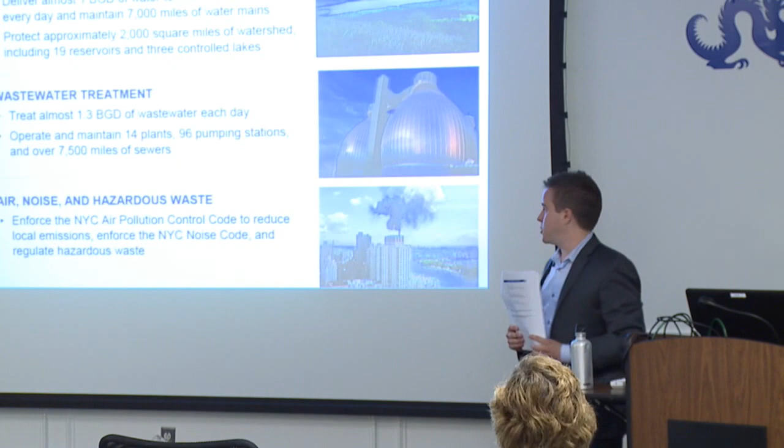But I'm going to focus mostly on water supply, wastewater, and our stormwater management system, which brings runoff from streets to the wastewater treatment system. So I'm going to give a broad overview today of our climate change risks as it pertains to these systems, and really try to focus upon what we're doing now to enhance resiliency.

So based upon what we know, we've already taken numerous measures, some of it regardless of climate change. These are things that water utilities have to think about anyway: drought, heavy rain events, flooding, etc. These are really part of the fabric of water utilities. The question is, how do we operate in the future? How do we adapt infrastructure to changing conditions? How will droughts change? How will floods change?

And so I'll first talk about our water supply system, where really the focus is precipitation, whether it's too much or too little. I'll also talk about our wastewater system, and touch upon extreme heat, which is not something we think about as much when it comes to wastewater. The wastewater system is also affected by coastal flooding, as we saw in Hurricane Sandy.

And stormwater is coming into increased focus. Green infrastructure is in the name of the seminar series. It's a topic that has seen a lot of focus in the past couple years. But increasingly, we're looking at how does green infrastructure function in the face of climate change. And we saw Hurricane Harvey just last week. The questions that we're receiving are, what are the capacities of these types of systems to handle the extremes and not just the everyday rain events.

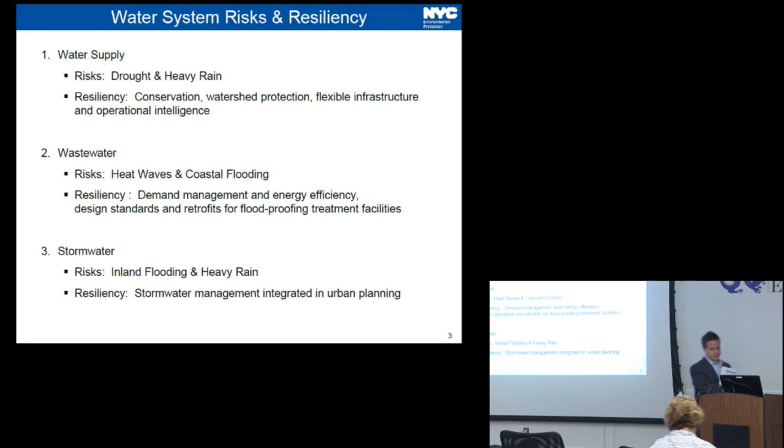So the New York City water supply is a vast system. It's comprised of 3 watersheds. Again, you might hear a little bit more details about this in Carol's presentation. On the left side, you see the 3 watersheds, the Catskill and Delaware system, in the west of Hudson watershed, and the Croton system, which is our oldest system in the east of Hudson watershed. The drinking water travels through an extensive network of aqueducts and tunnels, some dating back more than 150 years, flowing largely by gravity, so it's very low greenhouse gas emissions, and traveling from sources that extend as much as 125 miles from the city.

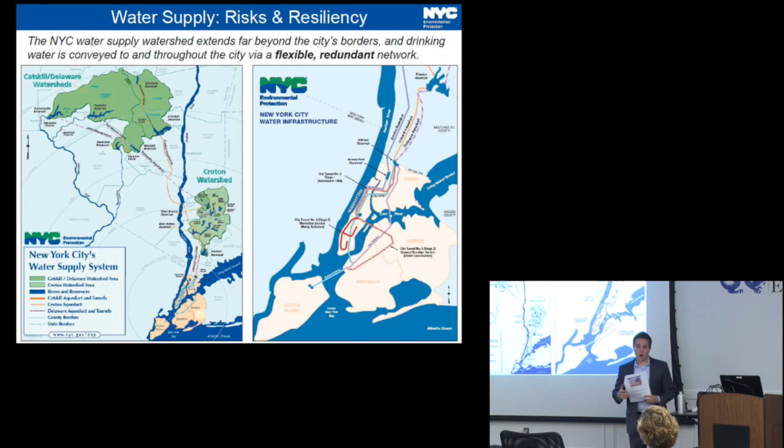On the right, you see our in-city tunnel system. And one of the features that you'll notice is that we have a lot of redundancy. We're in the process of building out the 3rd water tunnel. So this idea that if something goes wrong, you have a backup is really key to how we operate normally, and not just in the face of climate change, but it also becomes a climate resiliency measure. Because it's such a large system, in the wake of storms and droughts that cause disruption to one part of the system, we're often able to draw from other parts of the system, so we can maintain an uninterrupted flow of potable water.

We not only need to meet the city's drinking water needs, but our responsibilities extend beyond the city boundaries. We divert or release water from the system to communities outside the city. We maintain flow in the Delaware River. We support fishery and habitats and recreation. We generate electricity, and increasingly we've been enhancing flood mitigation provided by dams to downstream communities. So there's a lot of factors that we have to consider in the operations of our water supply system.

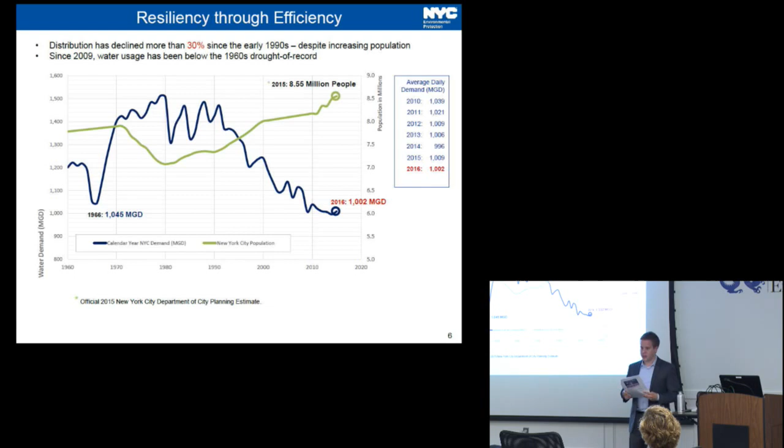We also have robust retrofit programs. A toilet rebate program that ran from 1994 to 1997 led to dramatic savings in water, and we now reinstated that program in 2014. And overall improvements in the efficiency of the new building stock is also important. So we continue to drive down demand through system optimization and fixture replacements at schools and public facilities, as well as residential buildings, and I'll just talk a little bit more about that.

This is just one example of the ways that we're bringing down demand. This is a spray shower at one of our New York City playgrounds. We're working in partnership with the Parks Department, and we implement playground spray showers that conserve water during high demand summer months by ensuring that the showers are only activated while in use.

Without timers and reactivation buttons, playground showers use approximately 5,600 gallons of water per day. Timers can reduce that by 50%, or approximately 2,800 gallons per day. So just last month we announced that 400 spray showers have been upgraded, reducing citywide water consumption by over 1 million gallons per day. This is just, again, one example of the pretty simple things that you can do, especially when you think outside the box of what a water utility typically does.

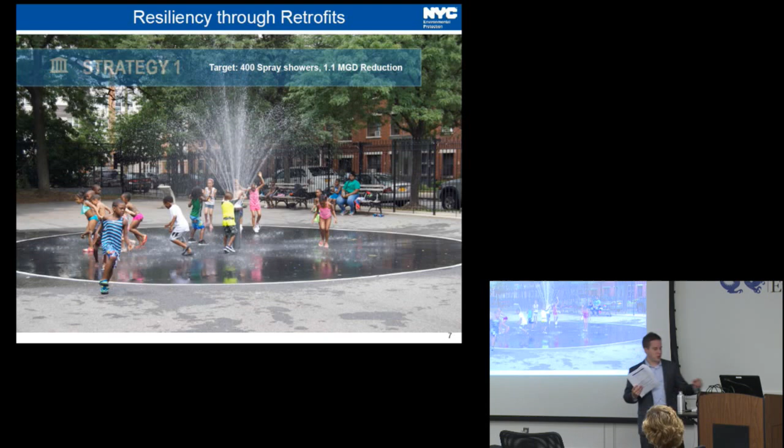You have to consider partnerships with other city agencies and ways that you can not just maintain your infrastructure and fix your infrastructure, but actually bring down your demands and enhance your sustainability. Another example, one way that we're working with the residential sector is through our water reuse grant program.

Other cities are doing this. San Francisco, for one, is doing this in the face of some of the concerns with regards to drought. What we do is offer private property owners capital funding to implement a system that essentially takes used water from flushing, from showers, from cooling, and recycles it into those systems. You don't need to use potable water, drinking water, for flushing a toilet. So why not treat it on site, bring it back into the building, and reduce the amount of potable water you're taking from the city systems.

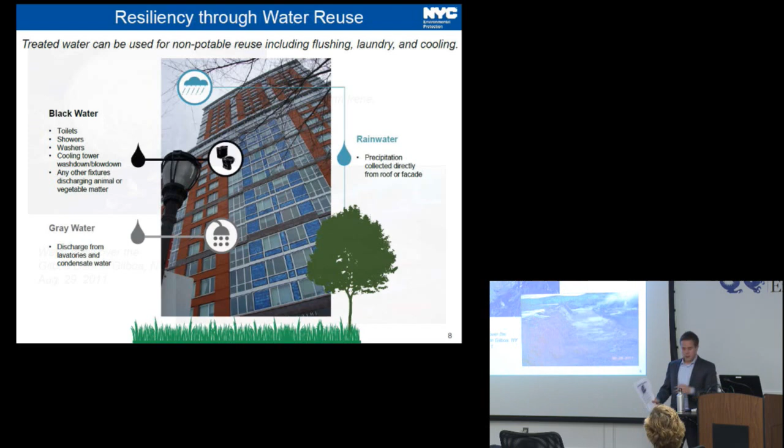So that's just focusing on bringing down our demand in the face of drought and other impairments to our system. But most of the issues that we see with regards to water supply and climate change, or that we anticipate seeing, are a factor of heavy rain events. We anticipate that heavy rain events will increasingly continue to stress our system, like we've seen in the recent past.

Heavy rain events like in 2011 with Hurricane Irene caused high pathogen and contaminant levels in our reservoirs. They increase turbidity, how cloudy the water is from sediment from nearby soils. Again, our water supply has enough flexibility - this isn't necessarily true of every water system, but New York City is very lucky that our water supply system has enough flexibility that we're typically able to withdraw from other parts of the system when this happens.

So this doesn't happen in all three watersheds the same. There's different geology in some of these reservoirs, so some reservoirs are affected more than others. Typically we're able to draw upon other parts of the system when one part is affected. The worst example we have of this - I mentioned on the drought side, our drought of record is the 1960s drought. On the turbidity side, our worst example is from 2011.

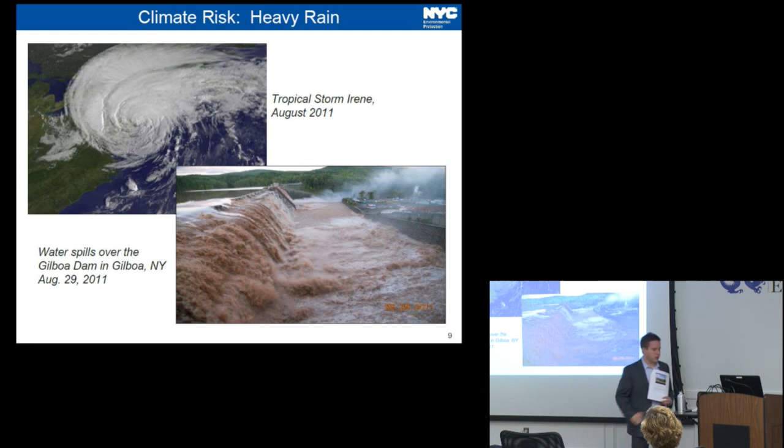So as part of that filtration avoidance, really our first line of defense is our natural systems. Maintaining natural conditions around our reservoirs supports really high quality water. The Catskill and Delaware watersheds are 75% forested. And again, since the early 1990s, we've maintained legal status that we don't have to build a filtration system because of the quality of the water produced by these watersheds.

There are natural solutions. You're always going to have to, especially when thinking about the extremes, seek out the green solutions. But ultimately you're going to need what we call gray solutions, your typical infrastructure fixes.

One example for our water supply is enhancing redundancy and flexibility through interconnections, like the Shaft 4 interconnection. It allows us to reduce flow from the Ashokan Reservoir, which is particularly prone to turbidity. So when turbidity is elevated there, we can reduce flow from that reservoir while still maintaining sufficient flow to meet water system demand.

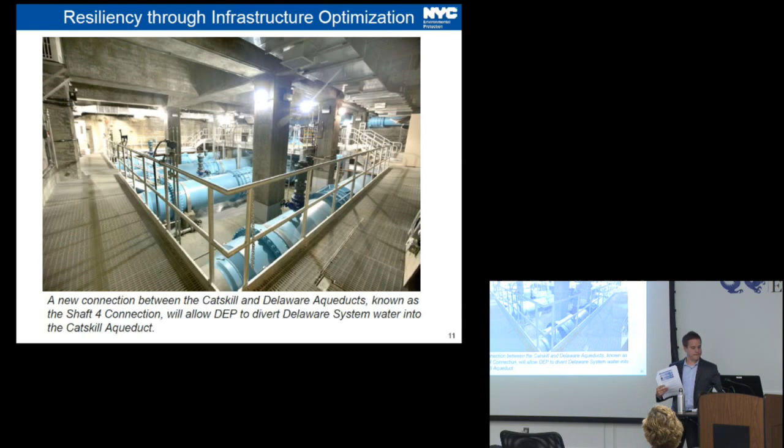Finally, on the water supply side, I want to mention operational intelligence. The more we can understand our system, the more we can make smarter decisions. In the past decade or so, we rolled out a system called the Operations Support Tool. It takes current data about reservoir levels and water quality, and incorporates forecast weather conditions and river and stream flows.

It merges data to check and confirm quality, then simulates water supply operation scenarios, giving us projections to determine how we can operate the system in different scenarios. That's useful both in the near term, managing day-to-day operations during anticipated weather events, and in making longer-term decisions. For instance, we can look at climate change and whether operational decisions tapping into the system's flexibility will allow us to be resilient to the types of changes we anticipate.

So with that, I'm going to shift over to the wastewater system. I've already given a high-level overview of wastewater. This shows our 14 wastewater treatment areas, those polygons represent the drainage areas for the 14 wastewater treatment plants.

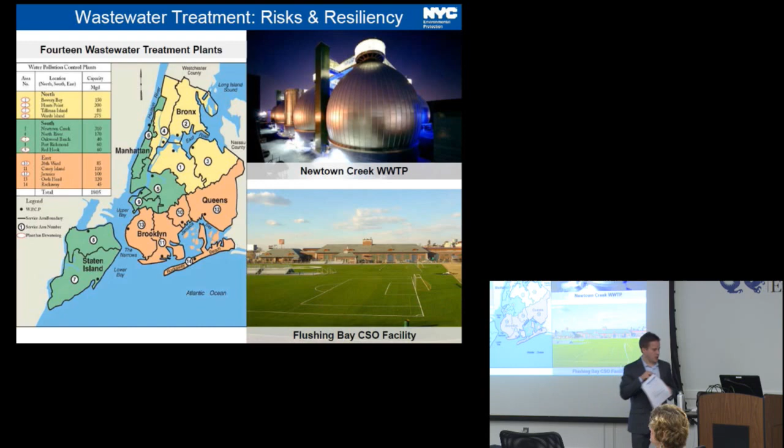I mentioned before that the water supply system is gravity fed and therefore uses very little energy. That's not the case for the wastewater treatment system, this is an extremely energy intensive system. As we continue to build additional facilities like combined sewer overflow facilities, that increases our energy footprint and our greenhouse gas footprint, which in turn can result in strain on the electric grid, particularly in high heat events.

I've talked mostly about flooding, high precipitation, and coastal flooding. But when there's a high heat event, in the past we've seen blackouts and brownouts that have caused wastewater to spill untreated or partially treated sewage into the harbor. We do have generators in place to help avoid that.

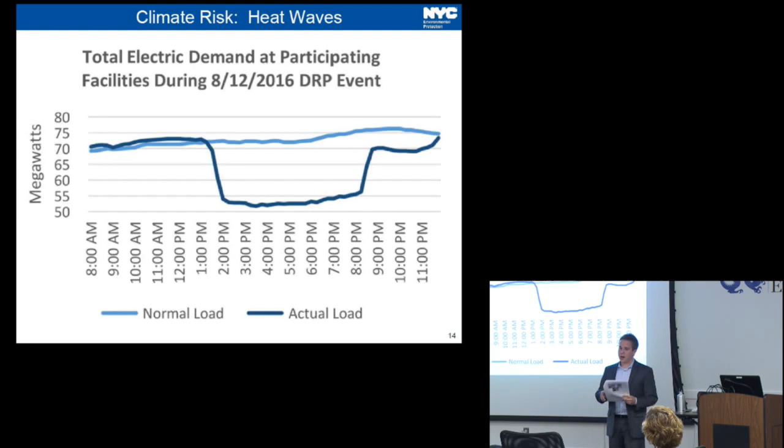But since 2013, DEP has been playing an active role in the demand response program with the state and the city. During a heat wave, we'll be called upon to reduce our demands and thereby mitigate the citywide risk of blackouts and brownouts. That's one way we mitigate risk temporarily, but in the longer term, we're also looking to reduce our energy demand with systems like solar panels.

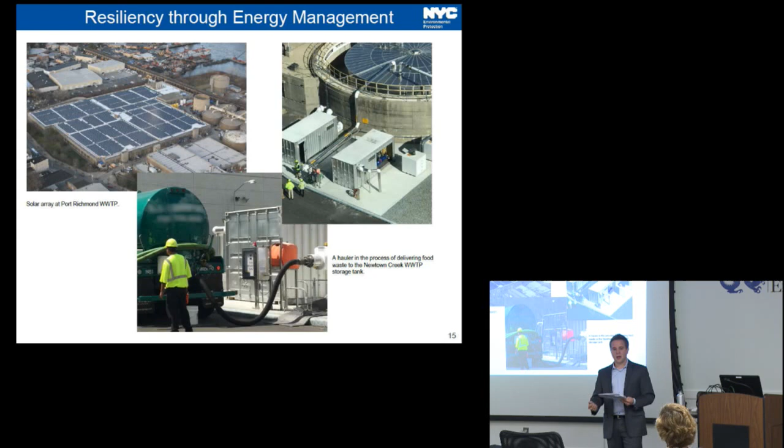Two of our other treatment plants beneficially use some of the gas produced on site for both heating and electricity. At the Newtown Creek wastewater treatment plant, shown in one of my previous slides, we're actually taking food scraps and using them to supplement the amount of gas produced by that facility, then cleaning it up and putting it back into the natural gas grid distributed to the surrounding community. So again, all these things take demand off of the system while also reducing our energy and greenhouse gas footprint.

So the perhaps most stark example of what we might see more of in the future was, not surprisingly, from Hurricane Sandy.

Beyond posing a citywide risk for storm surge and sea level rise, our facilities in particular are at risk. All 14 of them are located directly on the waterfront by design. It's the lowest point, so it can receive the majority of the flow by gravity. It also allows you to bring in ships to ship out the sludge. So that's not something you can necessarily just relocate.

They're there by design. But as a result of that, during Sandy, 10 out of the 14 wastewater treatment plants were damaged or lost power and released untreated or partially treated sewage into local waterways. 3 of the facilities were non-operational for some time, 2 for several hours, and 1 down for 3 days.

Some of the facilities in New Jersey and Long Island fared a lot worse than us and released a lot of untreated sewage into the harbor. We estimate that our contribution to that untreated sewage was approximately 560 million gallons of untreated sewage mixed with rainwater and seawater. So this is something we take very seriously.

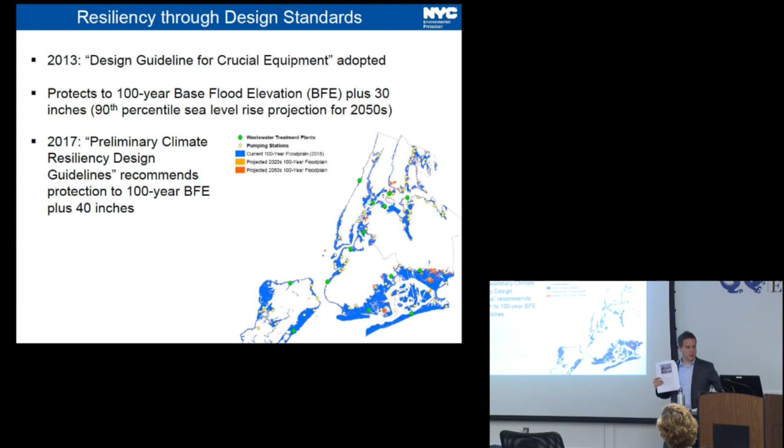So we couldn't just say we'll protect whatever new projects we have, but we also wanted to look at our existing infrastructure and what we would need to do to protect it and retrofit it. So we looked at all of our facilities below a certain threshold, that 100-year flood plus 30 inches, and we performed a risk analysis looking at critical ways that flood waters could get in them.

We found that all of our wastewater treatment plants are at least some part at risk, and 60% of our pumping stations are at risk. And then we didn't just leave it at that. We performed an adaptation analysis to see what measures we can take to protect them.

So the result is a portfolio of strategies, including elevating and floodproofing critical equipment. For the most critical assets, we chose the most protective strategy, regardless of cost. Whereas for less critical assets, we sought a strategy that balanced cost and protection.

And the plan showed that by investing just over $315 million, a large amount, in flood protection, we could protect over $1 billion in damage. If you look at the cumulative avoided damages over 50 years, so the repeated flooding losses from numerous storms coming in over 50 years, we estimate that you can avoid over $2.5 billion in damage.

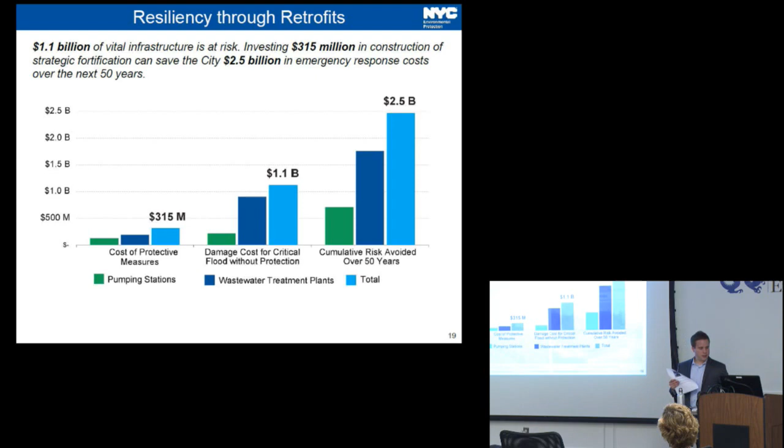So finally, with the last few minutes, I'm going to talk about stormwater.

It can cause sewage to spill into the harbor, or flooding to occur in low-lying areas. In addition to the larger facilities we've been building to manage combined sewer overflow, a few years ago we started to supplement the sewer system by capturing the first inch of rainfall runoff and letting it infiltrate into the ground. Through our green infrastructure program, we've formed important partnerships. That's one of the key themes. We can't just work alone as a water utility.

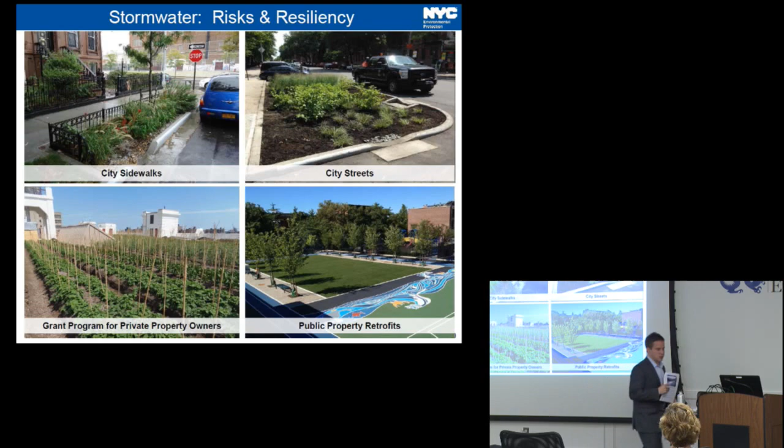Our grant program helps private property owners. The example shown here is the rooftop farm in the Brooklyn Navy Yard, I believe. And then public property retrofits also include schools. So this is a playground, which was typical asphalt covered up, and we took that. We helped fund this project that made it a more attractive space, but also reduces the stormwater that's running off of the property.

In 2011, Copenhagen's event resulted in close to $1 billion in damage. They had 6 inches of rain in 2 hours. For New York City, it's not a matter of if, but when we're going to see something—maybe not on the same level as Harvey, but maybe something similar to what they saw in Copenhagen. We've already had some close calls, as I mentioned before, with Tropical Storm Irene and the 16 inches of rain dropped just north of the city. In August 2014, Long Island had over 13 inches of rain in less than 24 hours. So it's coming closer and closer, and we recognize this risk and have to start preparing for it.

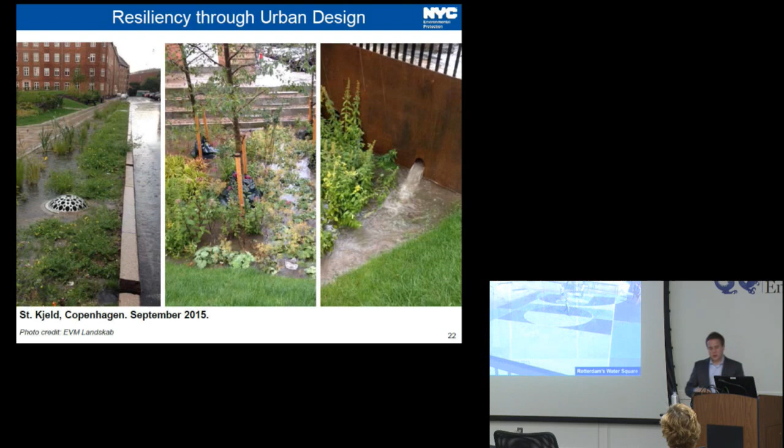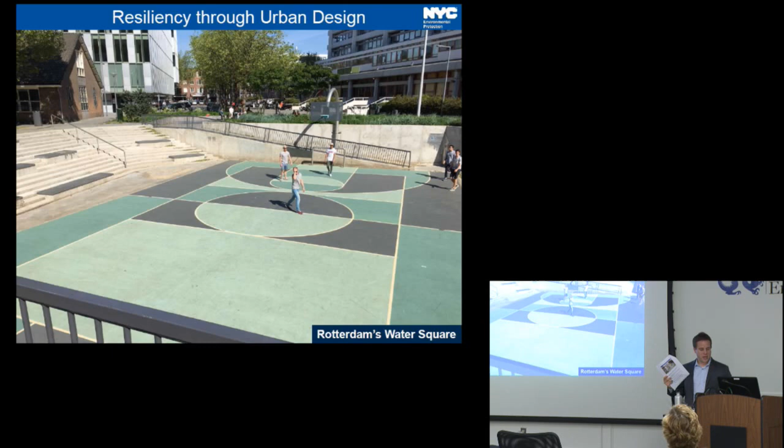And the principle behind it is that your sewer system will only help manage rain up to a point. Typically, it's about a 5-year storm that's the norm. You can't just dig up what you have in the ground and start over again.

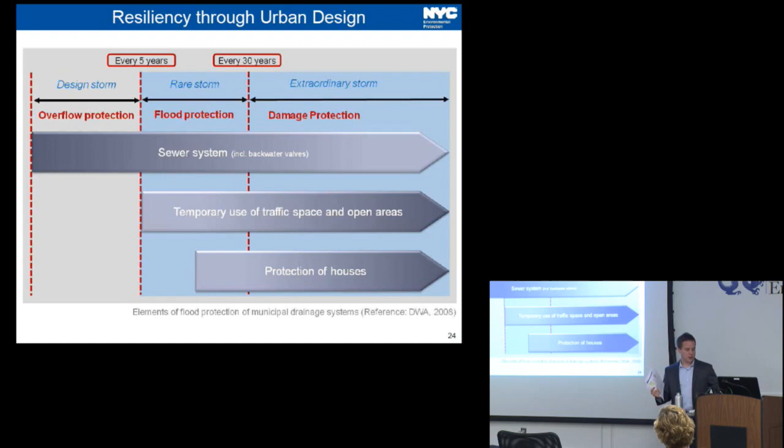So you need to decide how you use your streets and your parks. Instead of flooding regardless of what you do, you want to think about how you can flood by design, and see where water goes and try to route it in ways that minimize damage. Even then, there's always going to be a larger storm than whatever threshold you choose, so you always have to think about protecting property, particularly in low-lying areas. So we started to test out these concepts based on Copenhagen's approach in New York.

We did a pilot study in Southeast Queens, which is an area that has chronic flooding. We looked at how flood water would flow using modeling and how we can better manage it. We look at the underlying conditions, where there's green space that can provide opportunities for flood management, and then we look at how we can implement strategies that will slow and convey floodwater to mitigate impacts on the community.

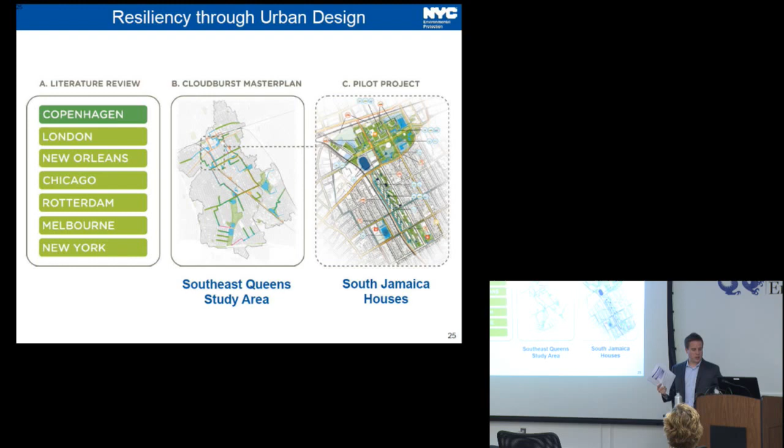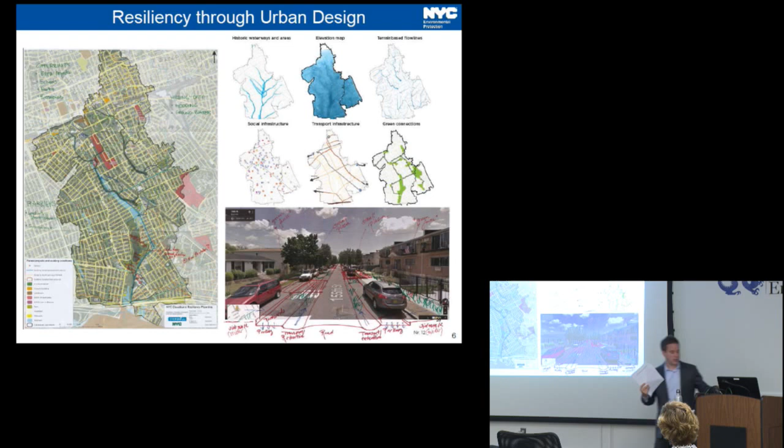When you develop your flow maps showing what would happen in an extreme event, you get these flow lines in green, which, when you compare to the historical maps, closely follow where there used to be streams and wetlands. We're not going to be able to recreate those streams and wetlands necessarily, but what we can do is look at modifying the flow, where it would go, and see if we can work within the context of the city to reroute it.

We use a couple of strategies to do this, including green infrastructure to slow water, as well as new strategies like recontouring streets and creating retention areas so that you can direct flow away from the streets and into those larger storage spaces.

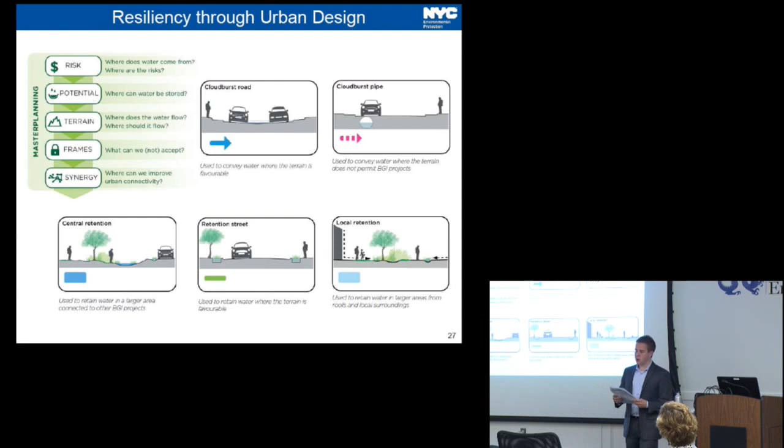And so at a conceptual level, what we've come up with for this part of New York City and Southeast Queens is a network. In green, you see the typical green infrastructure, ways to slow down water. In blue, it's areas and streets that would convey water, and areas that would store water above ground.

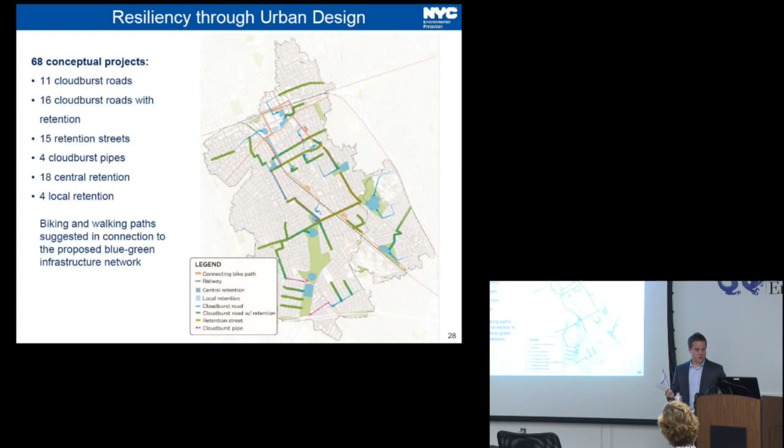And where possible, we sought to align these corridors with other opportunities to enhance community connectivity. For instance, you can align your street improvements with a new bike path, and that's something that's very big in Copenhagen, so we tested that out in New York as well.

So while this is being implemented full steam ahead in Copenhagen, we're still sort of in the proof of concept phase in New York. And what we're doing, instead of implementing the whole network right away, is a couple of pilot projects.

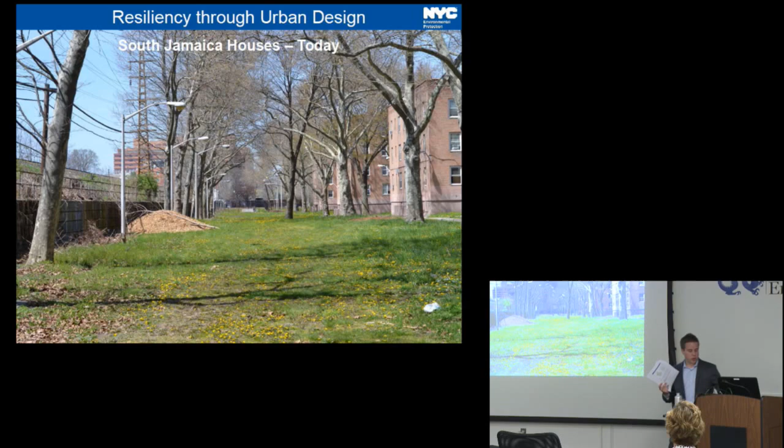The first is at South Jamaica Houses, operated by the New York City Housing Authority. Just as an example, this shows a green space that is underutilized, and while it's green, it doesn't really hold too much water. You can take a space like this, and similar to many of the other green infrastructure examples, you can transform it into something that is more actively used.

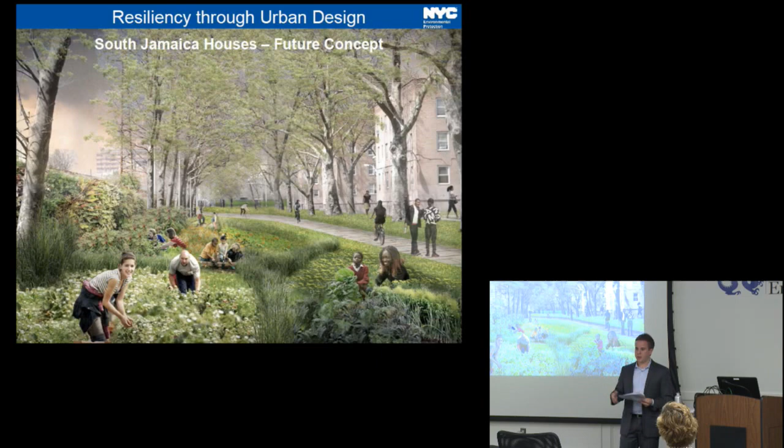This has a strong gardening community, and you could have a space that can redirect water, but also be used during dry periods for more active uses.

And the idea is that in an extreme rain event, it can flood safely. It might flood anyway, but this is being flooded by design. And if we're looking to Copenhagen for inspiration, flooding becomes this happy thing with ducks instead of a nuisance to the community.

So the concepts are really promising. We've already set the foundation for a lot of this through our partnerships and our green infrastructure program. And with just some slight tweaks, this might be something that we could use also to offset some of the flood risks to the city from heavy rain events.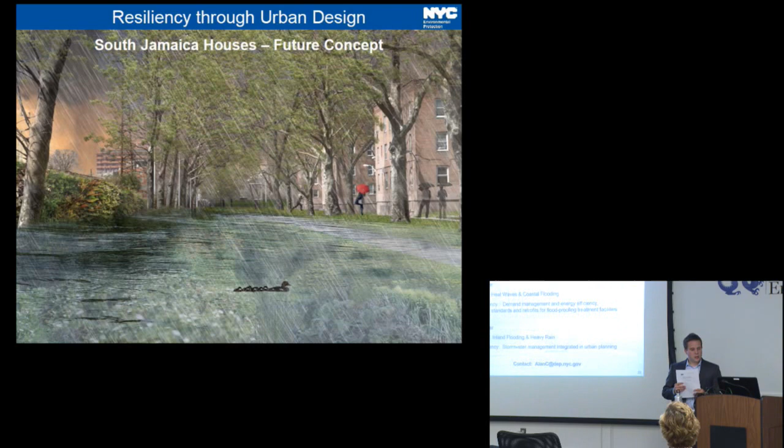So I'm just showing this slide from the beginning, again, in summary. But with that, I think we have a few minutes left, and I can take any questions.

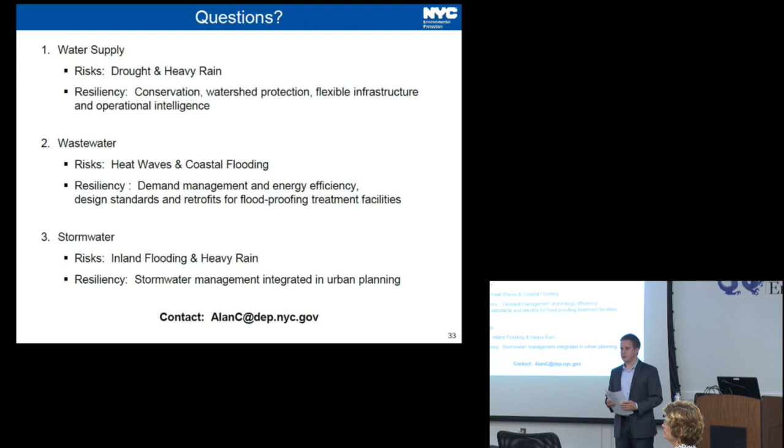You were talking about methane generated by the treatment plants, and I wanted to have you talk more about how you might reduce methane and other greenhouse gases in your system, or how you thought about that whole thing. I know you said some of it's being recaptured and directed in different ways.

So the question is about capturing methane and reducing methane emissions from our facilities. Where possible, we are taking it and using it on site for what we call cogeneration, so that is heat and electricity to operate the boilers used for wastewater treatment at that particular facility. That's the primary use, an alternative to traditional flaring, where we just burn it and it turns into carbon dioxide. That's happening at two going on three facilities, and the fourth facility that's capturing the methane is enhancing it with food scraps and feeding it back into the grid.

That's about 4 facilities that we're doing it right now, but it's something that we hope to grow in the future. Do you have other sort of examples or other facilities? No, just a concern about that. Yeah. Different ways that you might be lessening even the production of it to not have to recapture it. I don't know too much about any efforts to reduce methane production. It is a byproduct of the treatment process, as you probably know. It's not to say that there isn't some work that the agency is doing, so I can find out about that.

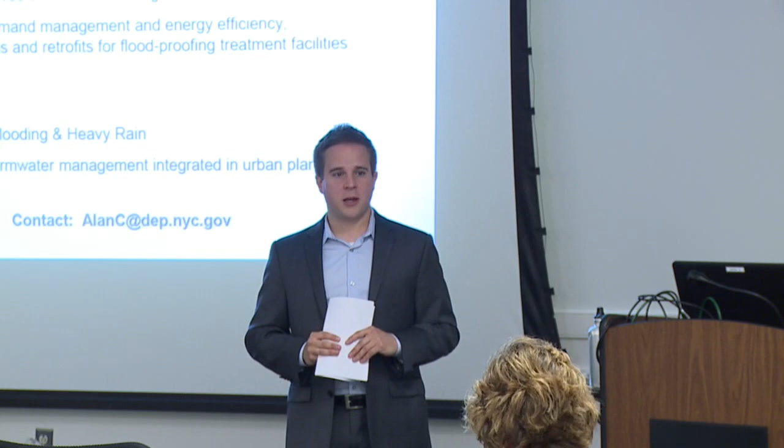It's a good question. So if we're looking at a more intelligent operating system for our sewers, for the most part, it's a much more passive system, so as far as I know, there's no plans to do that to the same extent that it's being done for the water supply system. I know that there is some hesitancy to put too much in the way of real-time controls into the sewer system, because more can go wrong if that system doesn't function as designed. So I think we're building up our monitoring capacity. There is the potential to do more of that in the future, and I think it's a direction that we might want to pursue when it comes to flood management. But at this point, we're not doing too much.

I thought learning from the Copenhagen project example was really interesting. Are there any considerations of public health risks from standing water that might remain in the structures that you implement? Yeah. So the question was public health risks from standing water from the example from Copenhagen. And I would say that and maintenance are the 2 concerns that we hear the most, particularly when we propose it to some of the other agencies that would actually have to own these systems. And Copenhagen's response has been that the systems that they've designed, in Rotterdam as well, I believe, drain down in 24 or 48 hours. So if we pursue this path, that's something that we definitely want to consider.

It's not just the standing water. So the concerns about mosquitoes, but also the safety concerns from kids falling into it that we would have to overcome. That's one of the big reasons that we're doing the pilot projects, because we need to think about those issues that we might not otherwise consider. And if we go full steam ahead and implement this citywide, we might not foresee some of those issues coming up.

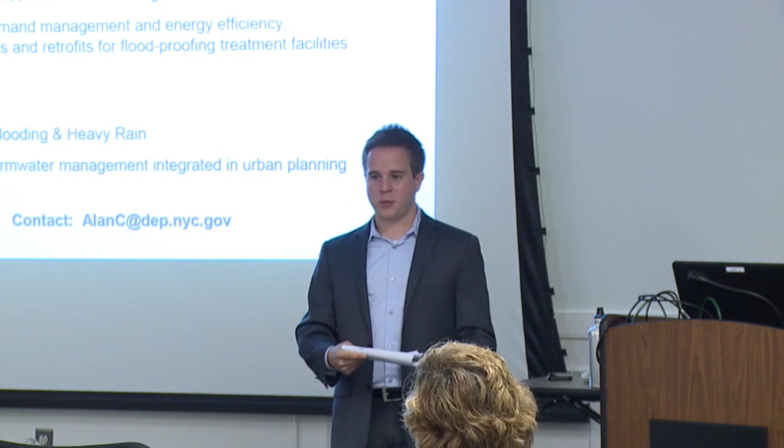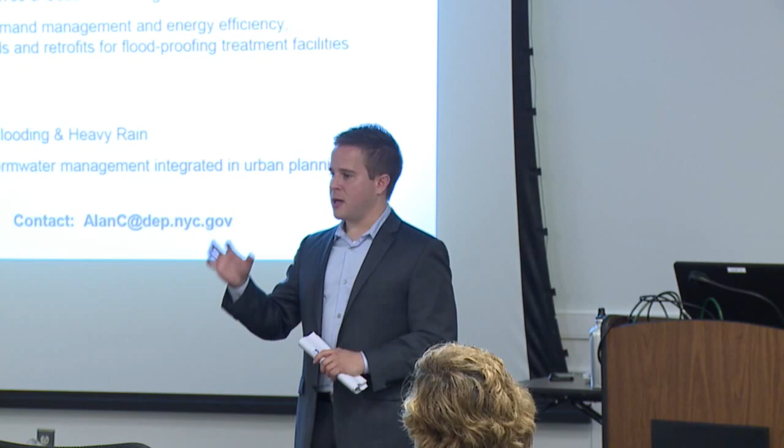So the question about where the power needs are coming from at our facilities, and as I mentioned before, it's almost exclusively wastewater treatment as opposed to water supply, which is mostly gravity driven, and it's pumping and treatment is the short answer. I don't know the details of what part of the treatment process, but it's mostly pumping at the facility as opposed to citywide pumping against gravity, and primary and secondary treatment of wastewater at the individual wastewater treatment plants.

Okay, thanks, Alan. Sure. So our next speaker is Carol Collier from the Academy of Natural Sciences of Drexel University. I guess we'll get your presentation up. Extend.

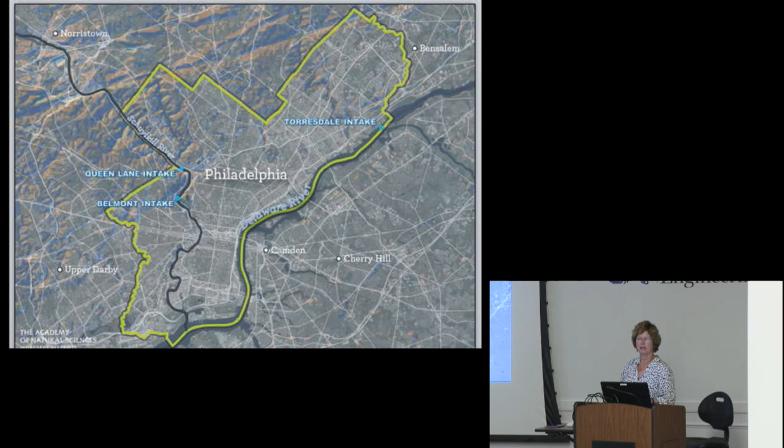So here we are in Philadelphia, Delaware River, Schuylkill River. 3 water intakes, 1 on the Delaware in the tidal part of the Delaware, that's the Baxter plant. 2 over on the Schuylkill, that's in the non-tidal area. But here we are in the lower part of this whole basin.

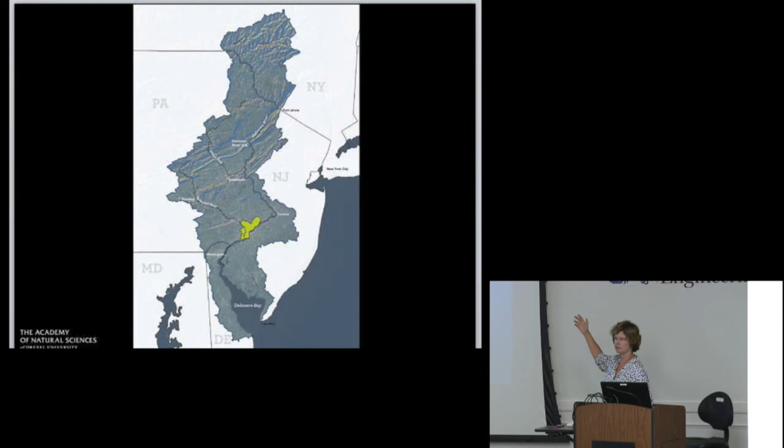And not only do we have 13,500 square miles of the basin, about 200 miles of stream upstream of us, but we also have the Schuylkill, which is the largest tributary to the Delaware, also entering Philadelphia. And we have a series of smaller watersheds. So Philadelphia, and I think other cities also, really can't control a lot of things that happen to them. They're really dependent on what their upstream neighbors are doing or not doing, both for droughts and floods. So you need to look at the basin.

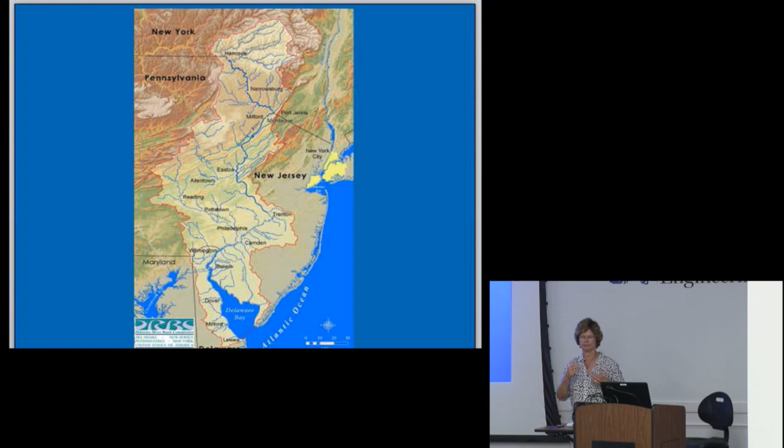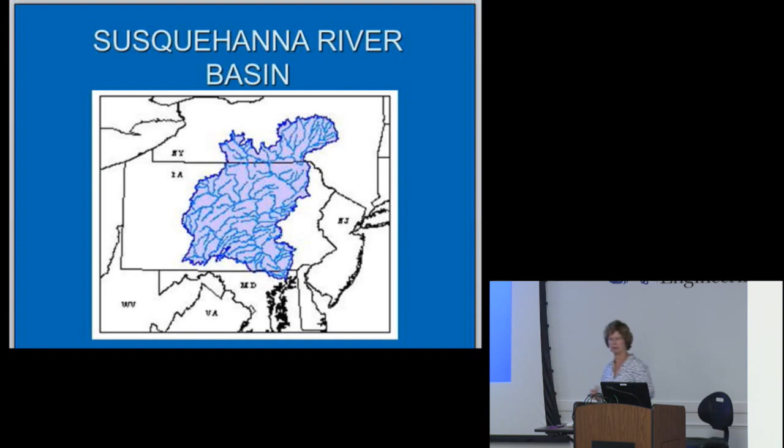The other thing I wanted to mention, I don't know how much of you've looked at the Delaware versus others, but one of the neat things about the Delaware is it is a totally shared river. Whenever you're standing on the bank of the Delaware, you're looking at another state. Just for comparison, the Susquehanna to our west I call a stacked watershed: starts in New York, state boundary, runs through Pennsylvania, state boundary, Maryland. But with the Delaware, you've got to have shared management because the water is shared. So it complicates things.

We have over 15 million people dependent on the water. As Alan said, half of New York City, and there are over 8 million people in the basin itself. Longest undammed river east of the Mississippi, incredible recreation resource, but think of it in a flooding and drought context, and a very used river, 8.7 billion gallons used daily, a lot of that for thermoelectric, so it goes back. New York City using the water, the #1 municipality, and unfortunately I had to change this to a 6. We used to be #5, but now we're the 6th largest metropolitan area.

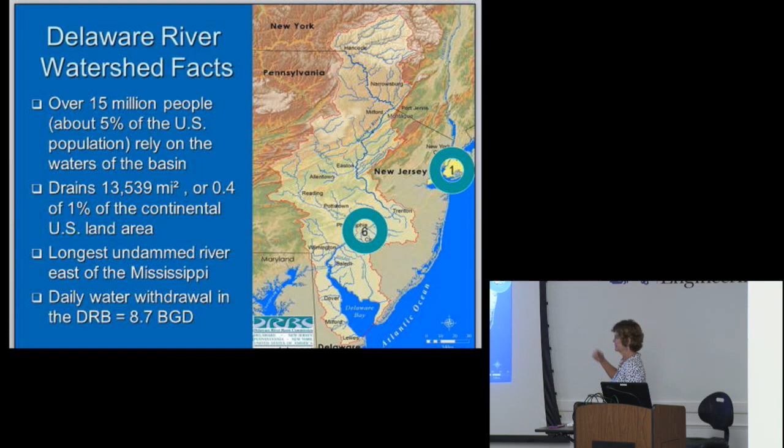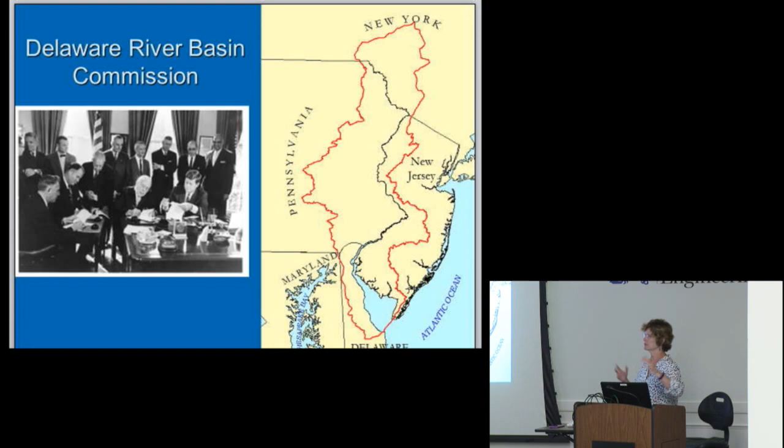Because of that shared nature, President Kennedy signed into law in 1961 the Delaware River Basin Compact, creating the commission. It has 5 members, the governors of the 4 states, and a general in the Corps of Engineers who represents the president. So the whole idea of this is to look on a watershed basis. Take your state hat off and say, what's good for the watershed? Don't look at the state boundaries. Sometimes it works, sometimes it doesn't. But it's a way to manage.

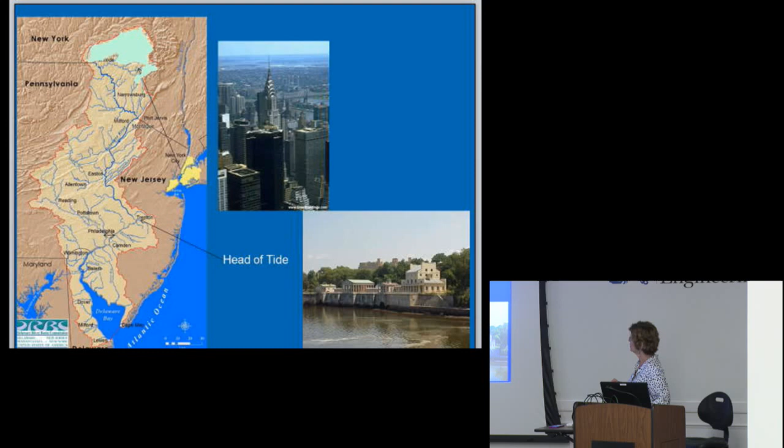So I want to go through both droughts and floods, sort of what the current management plan is, and then really hopefully have time for a dialogue on what we need to change. So as I mentioned, New York City reservoirs in the very headwaters, Philadelphia intake down in the tidal area, New York reservoirs, 271 billion gallons of water. If you were mayors or governors when New York City decided to put those reservoirs in, would you be very happy about it?

So, putting dams in the upper part of the Delaware. There were Supreme Court cases, determined by Oliver Wendell Holmes, reopened in '54 when they decided on the 3rd reservoir, and there was an agreement made, a Supreme Court decree. New York City could take up to 800 million gallons out of the basin. Just by comparison, Philly uses about 300 million gallons.

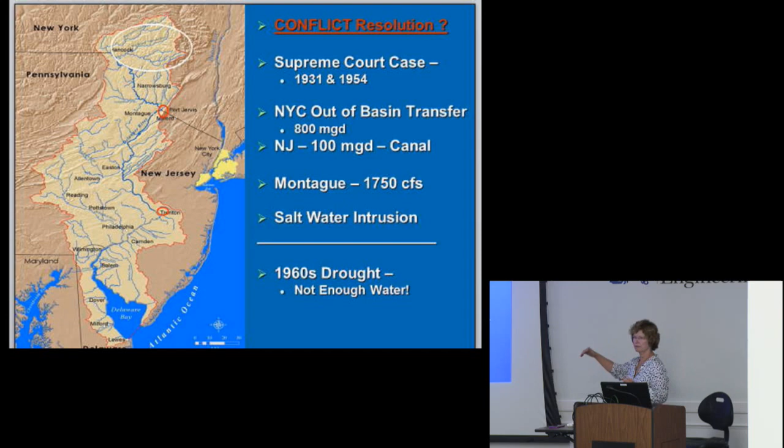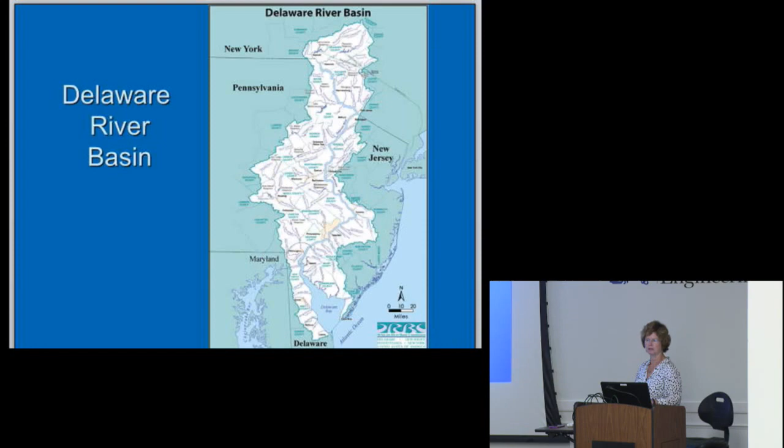River miles start at the confluence, so river mile 0 is where the Delaware hits the ocean. The drinking water intake at Baxter is at river mile 110; the Ben Franklin Bridge is at 100, just for comparison. During the drought of the 60s, the salt line—that's the salt content of drinking water standards, 250 milligrams per liter—was up at 102 river miles, so only an 8-mile river difference in a 12-mile tidal excursion.

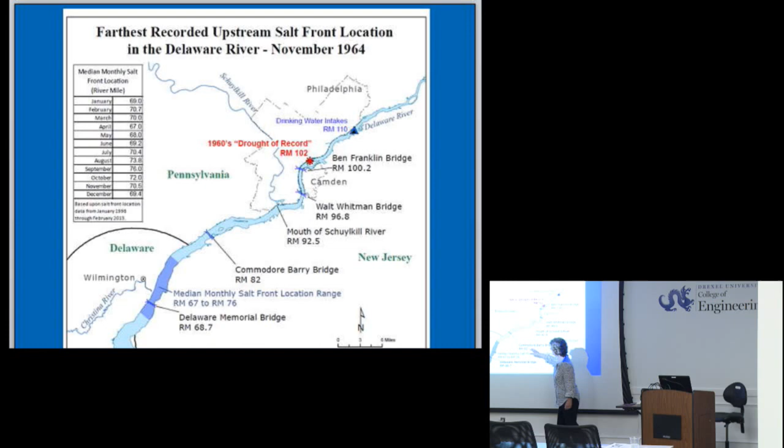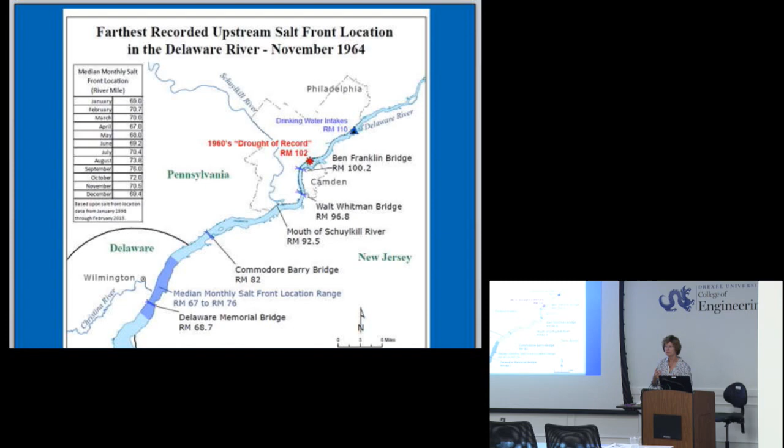It was really fun talking to reporters because they wanted to go up in helicopters and see this salt line. But normally the salt line would be down here, behind the Delaware state line. So there's the whole yin and yang of managing the basin. Philadelphia cannot do this themselves; they've got to work with others for that freshwater flow.

So what do you do? How do you manage water when there's not enough to go around? Do they go back to the Supreme Court, or is there some other way? Luckily DRBC had just been created in '61, so they used the offices of DRBC. I think they locked themselves in the Union League for about a week and came out with something called the Good Faith Agreement. Now, the parties to the decree are different than the parties to the commission—parties to the decree are the City of New York and the 4 states.

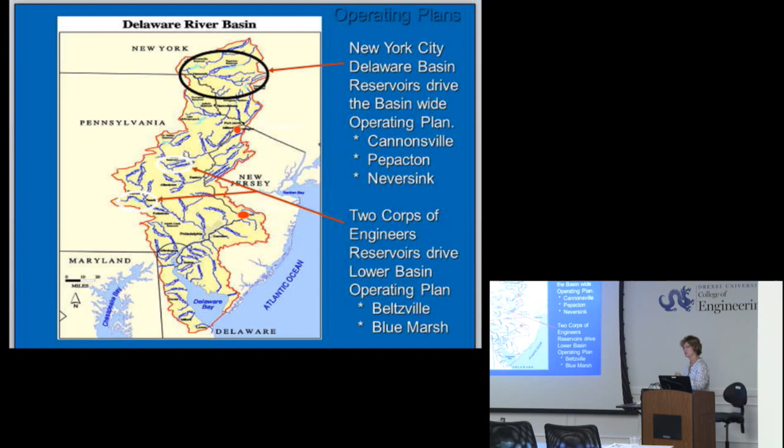This Good Faith Agreement essentially equalizes the hurt. As it stops raining and the reservoirs start going down, New York City takes less, the river gets less, New Jersey takes less—it sort of equalizes it. And it's worked. There's a New York City plan I'll talk about, and there were also two reservoirs built, Beltzville and Blue Marsh. Beltzville is up off the Lehigh River, Blue Marsh is on the Schuylkill, built and maintained by the Corps of Engineers, but DRBC actually owns water in those reservoirs, so it can call for storage and release. There's also a whole bunch of other reservoirs, privately or state held, that can be commandeered during droughts to be managed for protection.

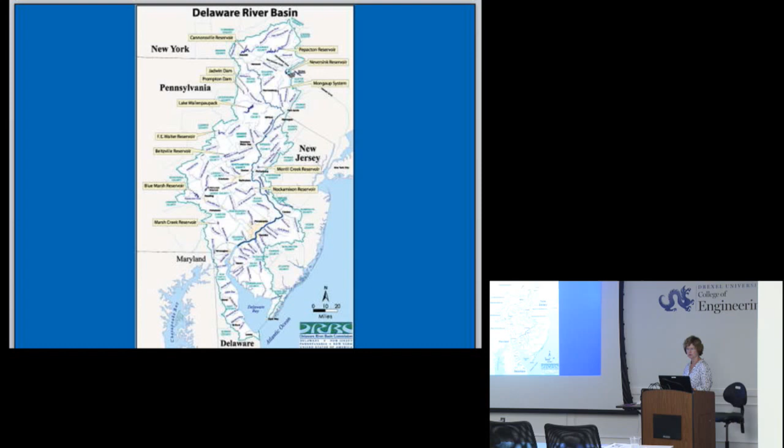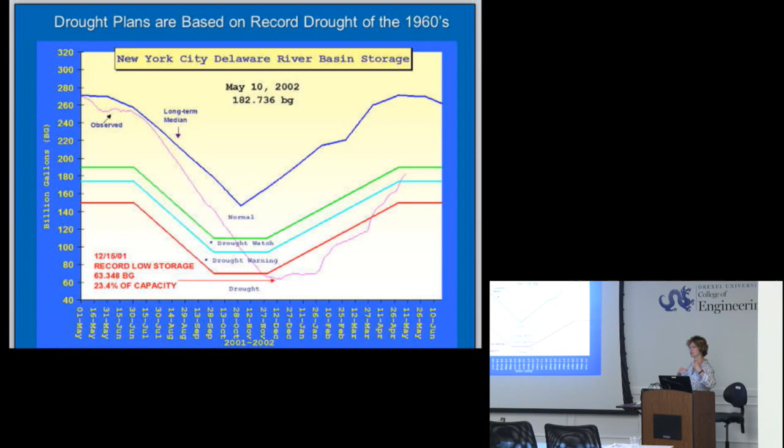It got more complicated. New York City reservoirs have release structures from the bottom, so they release really cold water. Who likes really cold water? Trout. And it's turned into a world-class trout fishery below the reservoirs in the upper basin. People come from Montana to fish in these areas. So there's a whole new constituency — fisher guides, motel owners, restaurant owners, etc. — who want the system managed for them, for the fish, not just for water supply.

When the Supreme Court looked at this, there were no conservation releases, there were no ecological flows, so it makes sense. The parties to the decree got back together and came up with a flexible flow management plan. While it conforms to the Supreme Court decree, there's more micromanagement, if you will, to protect the fishery and, from a flooding perspective, reduce spill or mitigate for spills.

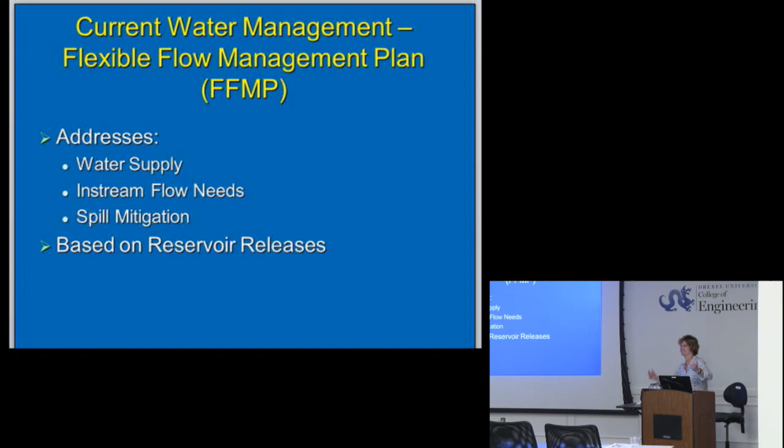Who upset the apple cart? Come on, you're among friends. A state across the river — who would have thought? Who would have thought? I know.

So what's the answer to a drought? A flood, right? That's how you end a drought. It only takes about a month to go from a flood to a drought, but it takes a day to go from a drought to a flood.

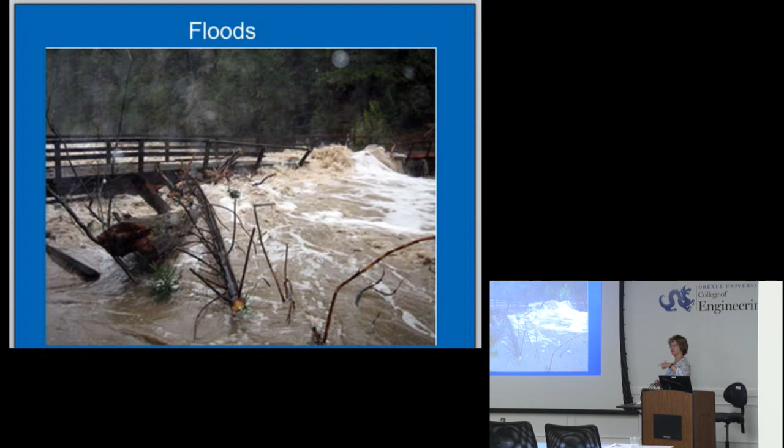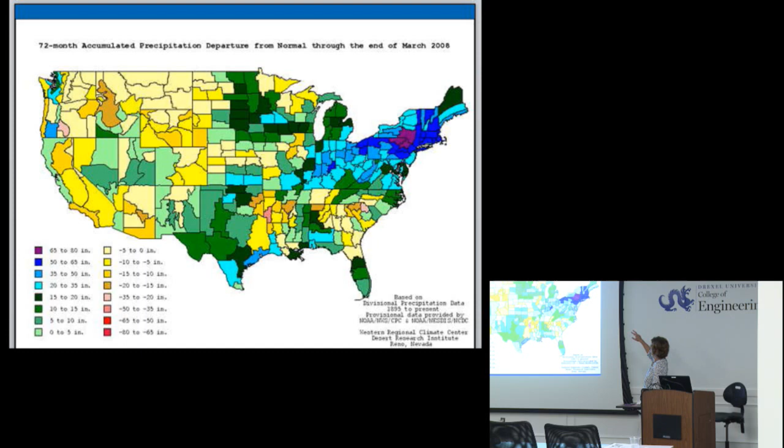It happens very quickly, and it's one that I say is less managed in the Delaware Basin. This goes back to the Palmer map in the 2000s. You can see we are in the wettest part of the nation, and we had 3 major floods between 2004 and 2006. This was on my watch. The Delaware was always known as the droughty river — the Susquehanna got floods — but this changed all priorities.

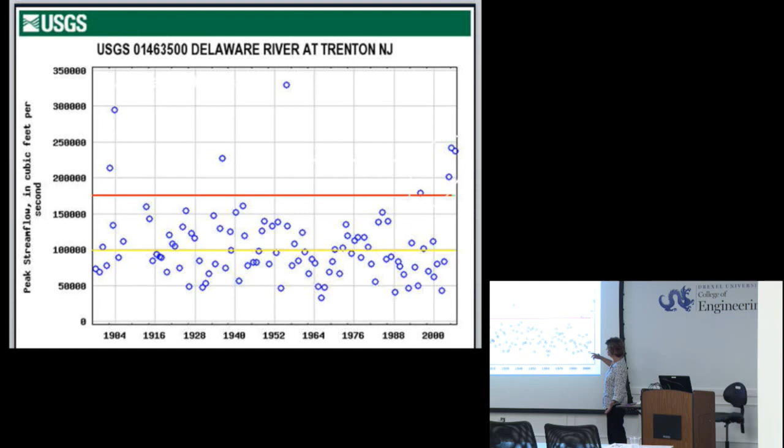This shows, from the early 1900s to over 2000, this red line you can say marks significant floods. This is the Delaware River at Trenton. A low flow number you want to maintain is 3,000 CFS. The red line is 175,000 CFS. So this is a toad choker — that's a technical term for a big storm.

1903, major storm. 1955, storm of record, flood of record. And then here are the three grouped — almost 50 years, or it was 50 years, between these floods. So it was not something we were dealing with.

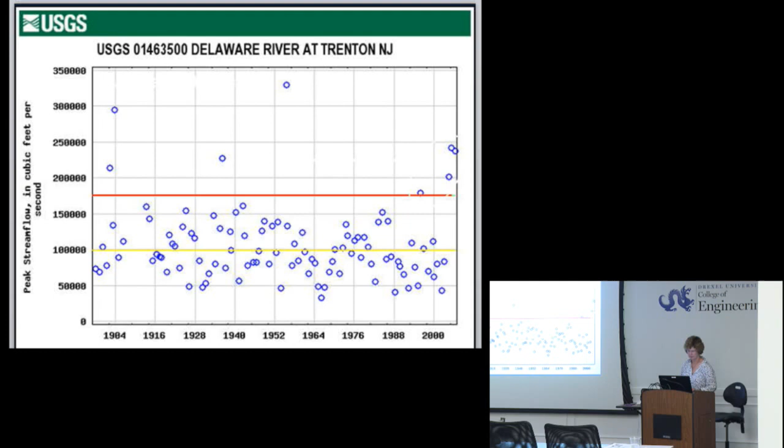The governors got together and said they wanted an interstate task force. It was really well done — there were 6 major categories, 45 recommendations, but not a lot of political willpower to enact them. A lot was in flood warning, which I'll talk about. There were some really good floodplain regulations put together.

They may still be on the DRBC web pages, but they were not enacted. Floodplain mapping recommendations were to tighten up the standards, especially for the floodway, to make that larger. That was not done. So it's a question of what's science and what is politics.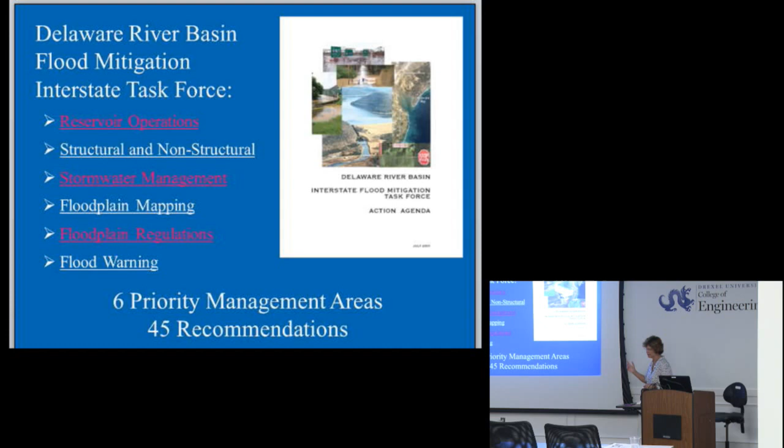But for flood warning, there's some neat stuff. AHPS, does that ring a bell? Advanced Hydrologic Prediction System. This is great, and you can just go out on the NOAA website. It was originally for emergency managers, but people along the river use it all the time.

What it shows is, this is the Delaware River at Trenton again, on a Saturday in October. The solid line is the stage, the height of the river. So it's 8 feet going along, and then once it goes to the green, that's predictions. It shows that at 2 o'clock on October 2nd, it's going to crest at 20.9 feet.

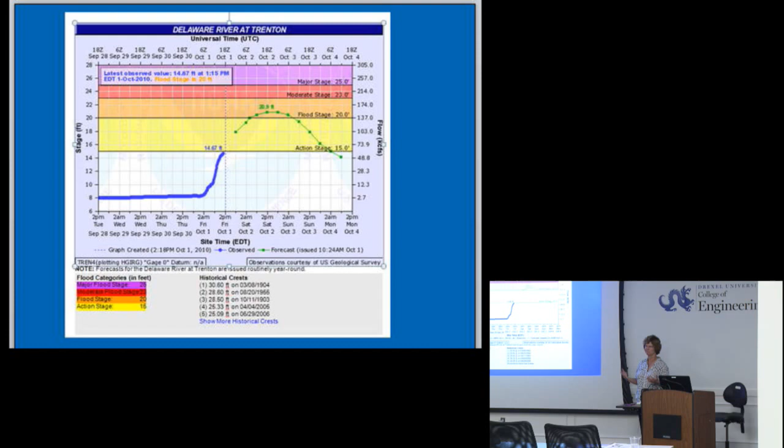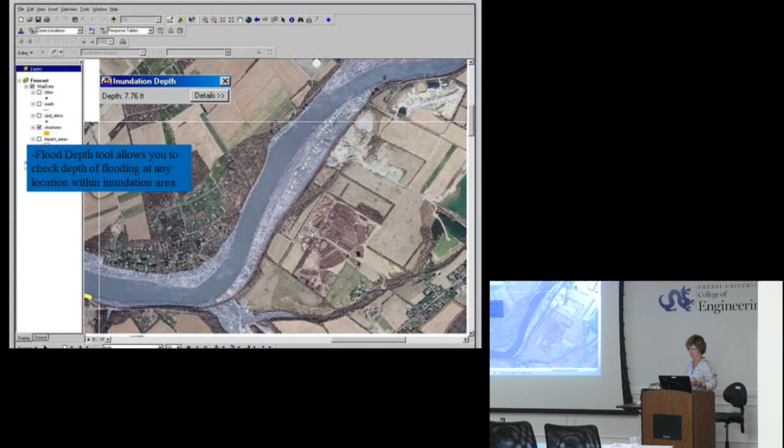Pretty neat stuff to have if you live close to that point in the river. But who knows, if you live on Main Street and there's 20 feet of water in the river, do you know how much water is going to be at your house? Not so much, right? So the USGS, NOAA, and Corps of Engineers worked together and did this Inundation Tool, and this is also on the NOAA website. You can use your cursor to mark a point, say this is your house, and put in that it's 20 feet deep at the crest of the river, and it will tell you how deep it's going to be at your house. It's really pretty cool. So that's out there, that's usable.

I was just talking to Gary Szatkowski, who was the lead forecaster at the Mount Holly NOAA lab. He's retired now, but he still does weather, and he showed me this. This is ensemble forecasting that they do. This is also available to look at, a whole number of models.

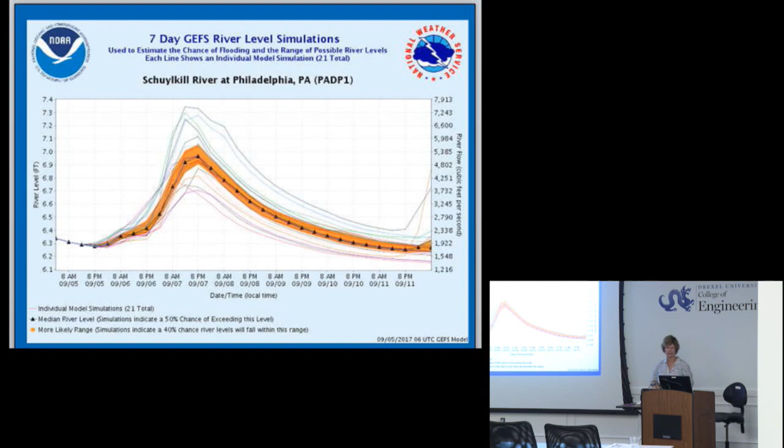This is a river level simulation at the Schuylkill at Philadelphia for right now. And this goes out a lot more days than the AHPS does. So that's what the hydrologists use. Some neat tools available.

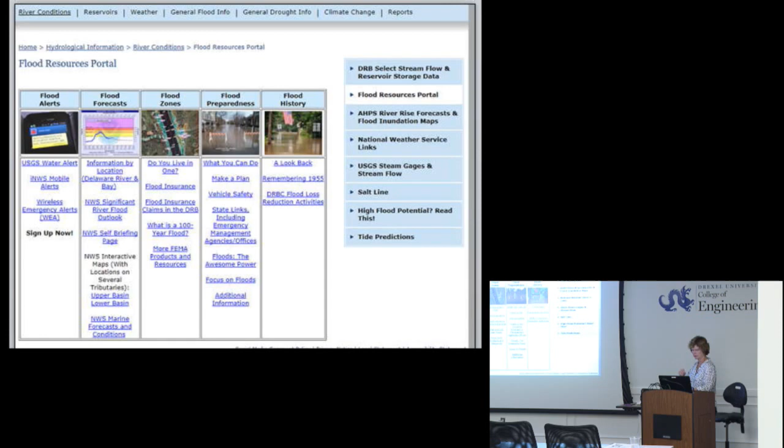DRBC put together a flood resources portal, so you can go there to look at the AHPS and different issues for flooding. It's just drbc.net, and it's pretty easy to get through their website.

And the people were like, how was it allowed to be built here? They were really panicked. So how do we work with townships when we're in states, both on this side of the river and the other side, that are local rule? Municipalities do land use. So how do we work with them for flood and drought situations?

The other thing with land use, I love this map. Urban is red, ag is brown, and green is forest. We talk about green infrastructure, that's my green infrastructure right there. Look at that, 81% forested in that upper basin. And if we can keep that, think what a buffer that is for our urban area.

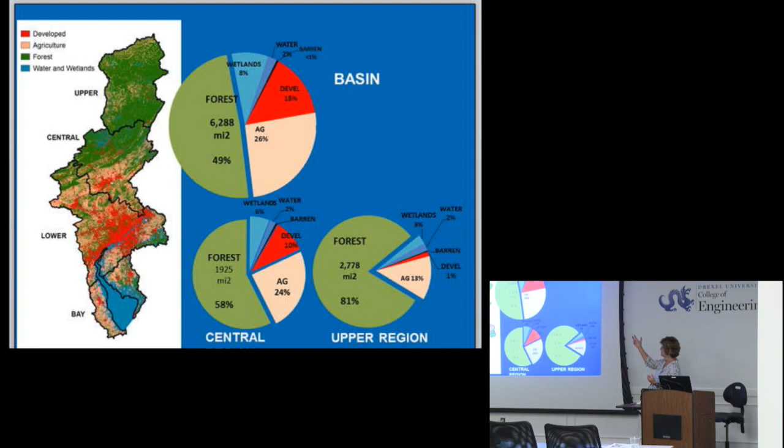So how do we show these people, one, that those forests are important to the local people up there, or have some kind of financial model that the lower basin can support for protecting the forests up there. So top down, bottom up. We think of silos for water, wastewater, stormwater, water supply. We need to think of them as one, right? Because there's only one water.

Decision makers like black and white, like Alan was talking about the numbers, how he convinced the powers that be for the wastewater plants. But with the uncertainty of climate change, stationarity is dead, so it's really hard to give that black and white answer decision makers want, so we've got to deal with that.

Regulations are really important. I've got point sources under that. Regulations are really good for point sources, for water allocation, etc. But when you're dealing with some of these issues, it's got to be more collaboration, education, dealing with non-point sources, dealing with land use, and protecting the forest. So it's just different management schemes.

One thing I wanted to mention that I'm involved with, headed up by Roland Wall in the back there, is this Delaware River Watershed Initiative. It was kickstarted by the William Penn Foundation, and the purpose is to develop watersheds that provide sufficient clean water to support healthy, natural, and human communities. Pretty big goal. It's in the Delaware Basin.

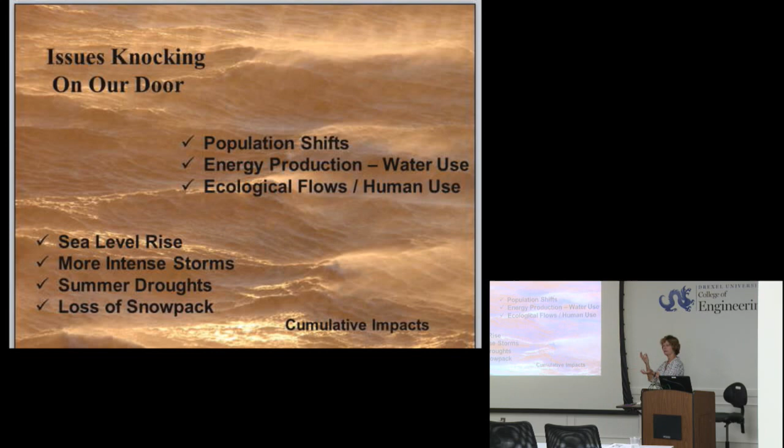The Nature Conservancy has done the science for what flows need to stay in the river, at what levels in streams and seasons, but it has not been put into effect yet. And one of the issues is, if you keep more flow in the river, there's less sustainable yield for water supplies or water withdrawers. So how do you balance that, especially when things get dry?

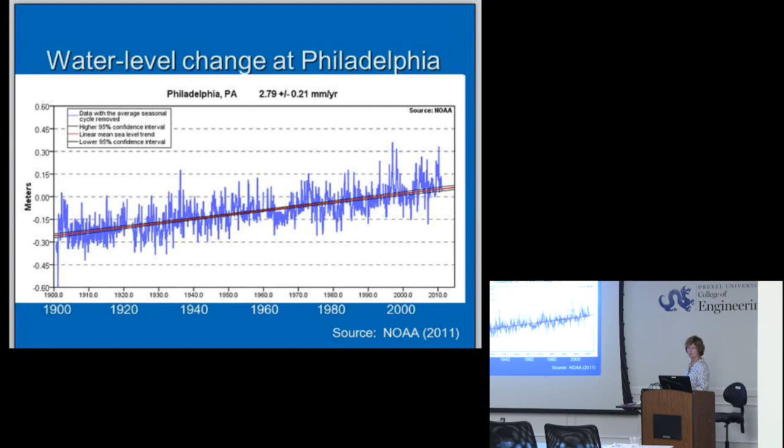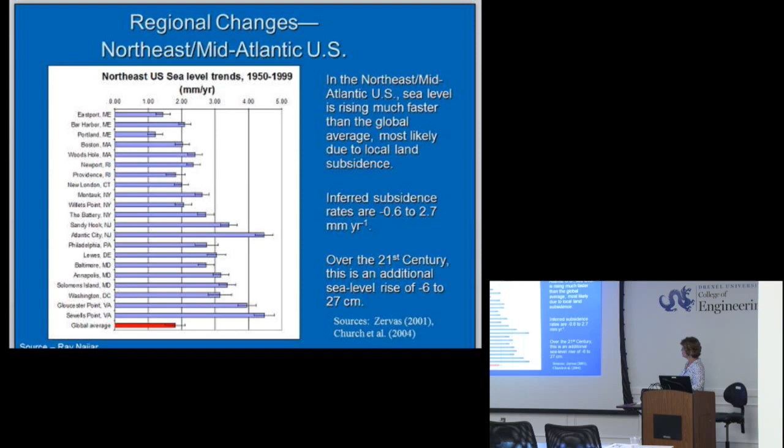For the seawater issues, the salt water, we know the water levels are going up. We know that sea level rise is going to be higher in the mid-Atlantic area than other parts of the globe, so we're going to have higher levels. And that takes us back to where we started, with droughts and water supply in Philadelphia.

So the two red dots are River Mile 110, the Baxter plant, and then there's a New Jersey American plant right opposite it, just a little bit up. This was a study done by University of Pennsylvania - it was just a design studio, not peer reviewed, but they used the drought of the 60s flow numbers with a 1 meter sea level rise.

And they said with that, you could have the salt line 4 miles upstream of the water supply by 2050, 7 miles by 2100. Now this was done a couple of years ago, so I'm sure it can be tightened up, but the fact is true: if it was at River Mile 102 just for the drought of the 60s, when you add 3 feet of water to it, it's likely going to go up.

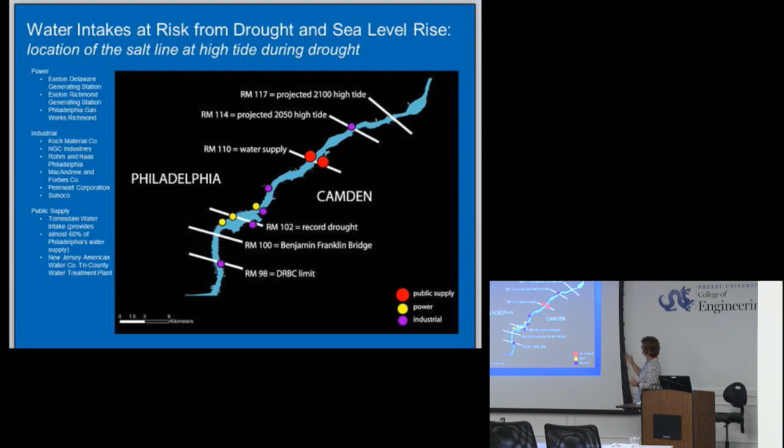So what the heck do we do with that? That's one of my famous quotes, I love it, especially being a planner - so how do we plan? All these things have to be put together. How do we control this salt line?

Even if the intakes were moved upstream, there's freshwater marshes, really unique tidal freshwater marshes. Critters like the oysters, their life histories need different salinity levels. There's a lot depends on that salt line. So what do we do?

And then the other issues: future water demand, and the reservoirs, both for flood and drinking water, because there's 2 different types of reservoirs. If we have more intense storms, they're not going to catch as much - they're going to spill more than if the precipitation was more even over the year.

So how do we fit that into it? Do we need more water storage? What kind of water storage? How do we address ecological flows versus human water needs? And then flood reduction—I'm talking more about what Alan was saying with the Copenhagen situation, or big basin storms, not what can be handled by small green infrastructure work.

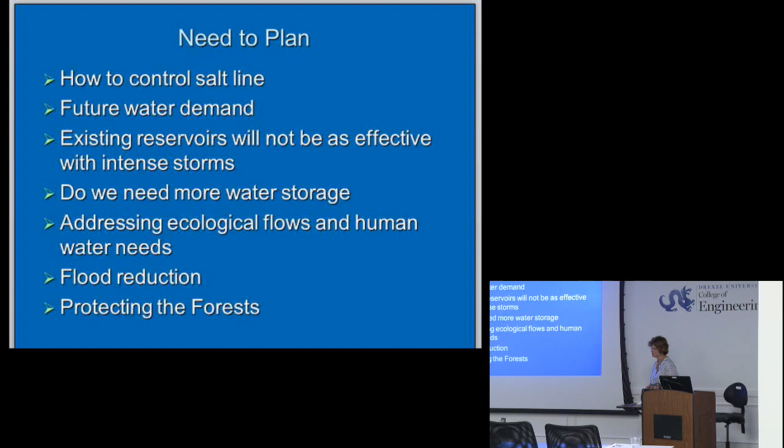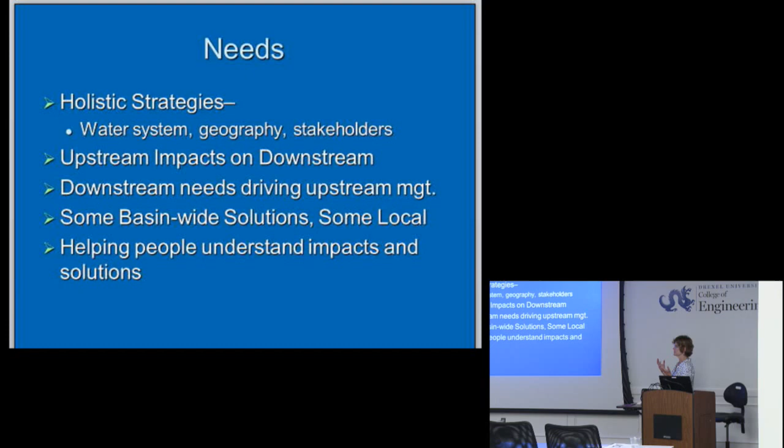What do we do for the bigger stuff? And then, of course, the forest. We need holistic strategies, and we need to look at what's upstream doing to downstream, and how downstream needs affect upstream use, in a team approach—basin-wide solutions and local—and helping people understand, like the people in those condos. It was sunny out when they got flooded. There was 15 inches of rain upstream, but the sun was out by the time they got it. They had no clue what was happening, and there was all kinds of blame, which is a whole other story. People don't understand the systems part of it.

DRBC is putting a strategy together looking at 2030 and 2060, using the IPCC scenarios as a base, USGS for temperature, precipitation, etc., and then their water demand availability and drought resilience work. That's underway. The City of Philadelphia has a whole adaptation program looking at their watersheds work. But my question, if we have time for discussion, is how should we do this as a community?

If we've really got to get the land use side of it as well as the basin scale, who do we need at the table? How should we be doing this so we have a resilience plan for the basin that protects us down here in Philadelphia? I think that's it—I sort of ran through that because I wanted to have 2 minutes before we left.

Questions for Carol?

So I'm curious about legal stuff. Legal stuff? So where's my attorney? You got no help. So you described a couple of court decisions and a compact and then some planning that may be fracturing a little around the edges.